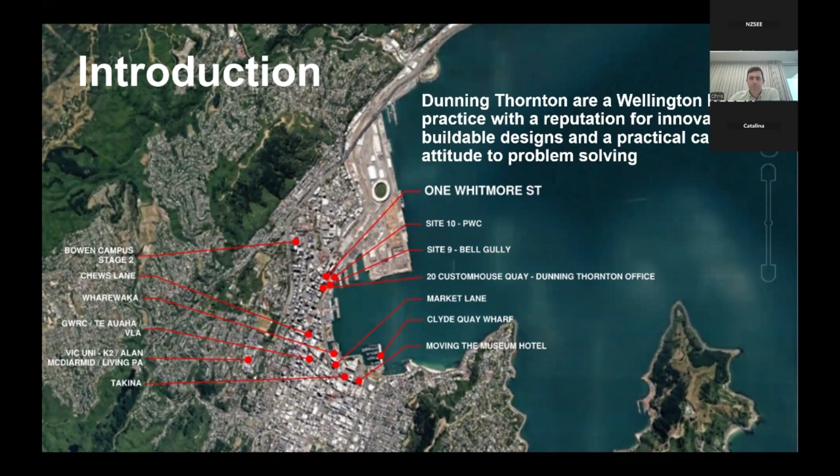This project was instigated by our client Newcrest, a developer based in Auckland, but recently they've done a lot of their work down here in Wellington. It was the second project we've done with them of this scale, the first being the building we're in now, 20 Custom House Quay.

Luckily, we also had a number of subcontractors engaged early who had been involved in the 20 Custom House Quay project. They were MJH, Thermosash for facades, and Robinson Seismic for the base isolators.

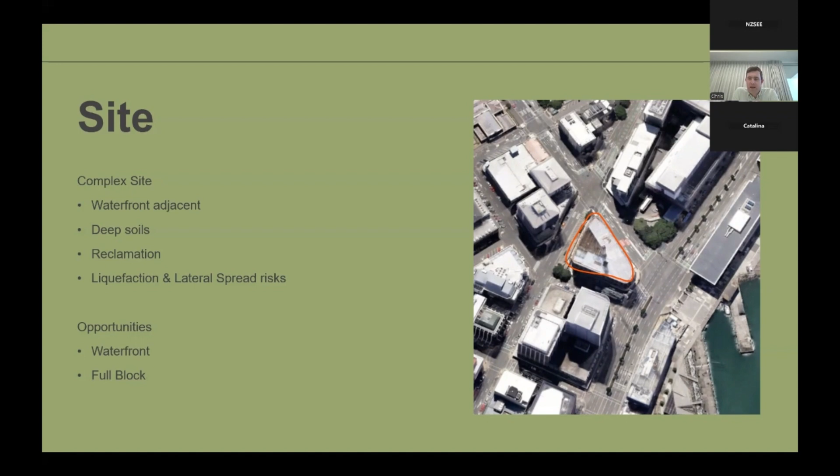That said, massive opportunities for this building. It's an incredible site, panoramic views in all directions. You can see up to the Beehive and see all of the waterfront. And so an amazing, once in a lifetime site in Wellington.

So we've worked on a previous project before with the same client, 20 Customhouse Quay, and we were looking for the same kind of performance criteria as that building. So it's an importance level 2 building, so we're designing for a ULS of 1 in 500 years. It was benchmarked against current code, but we carried out geophysical testing, including boreholes to rock and shear wave testing down to rock, and established a more modern seismic hazard for the site using PSHA techniques, which were carried out by GNS.

Being a base isolated building and having quite a long period, at the long period the hazard and accelerations were quite similar to that of current code. And that's what we've seen as being one of the benefits of base isolation, particularly in Wellington, is that you're not seeing this significant uplift in accelerations when you look at these PSHAs or the National Seismic Hazard Model.

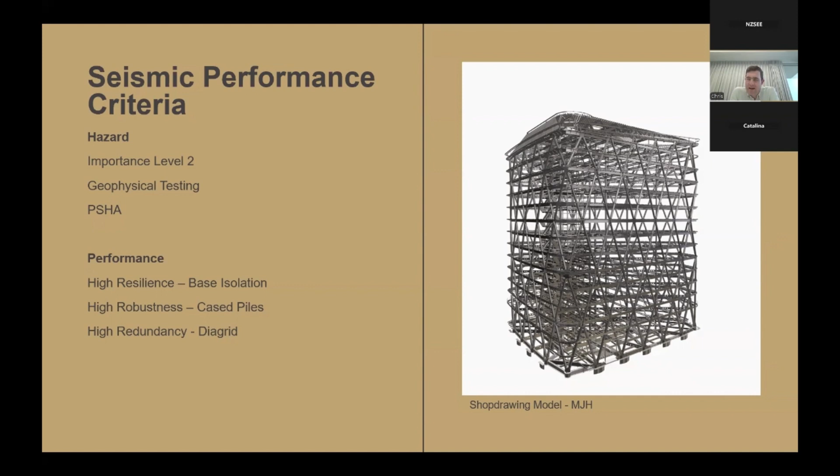So in the ground, we looked at the base isolation structure. So we started at ground floor. So the ground level of the building is raised above the existing surrounding ground by nearly a metre, and that provides the benefit of flood mitigation, and also simplifies some of the detailing required for the base isolation. So we generally try with these buildings to have the ground floor pass over the perimeter ground, and it just provides a much simpler and more affordable base isolation detailing.

But we still needed to build a kind of a semi-basement below the building to accommodate the P-delta structure, so the large structure for the ground floor, and the base isolators and their support structure underneath. So we were still excavating down 2 to 3 meters into this reclamation material. So we weren't removing it all. We had a basement that didn't have cars in it. It was just a rattle space.

What we tried to do to mitigate some of the risks around the ground and potentially these overload cases is that we wanted to target having the largest moments in the piles within the depth of the casings so that we could have a very high safety factor in effect over the loads that we were seeing from the geotechnical analysis. And what that meant was that we didn't want to have a fixed head pile because we wanted the large bending moment to be in the casing depth.

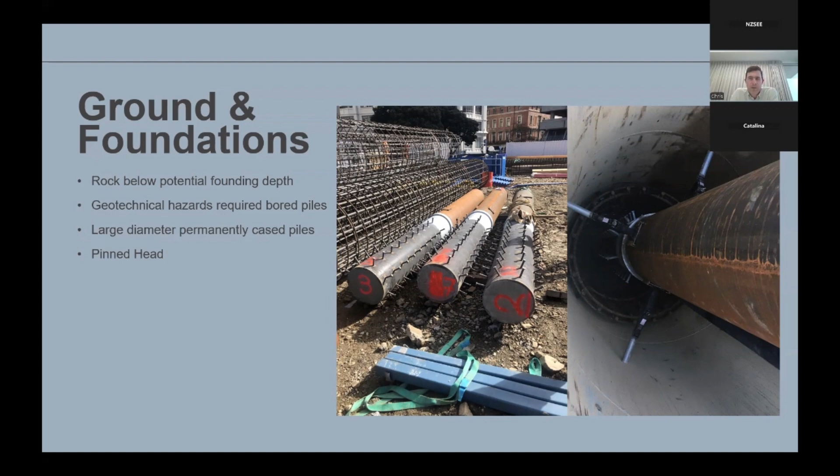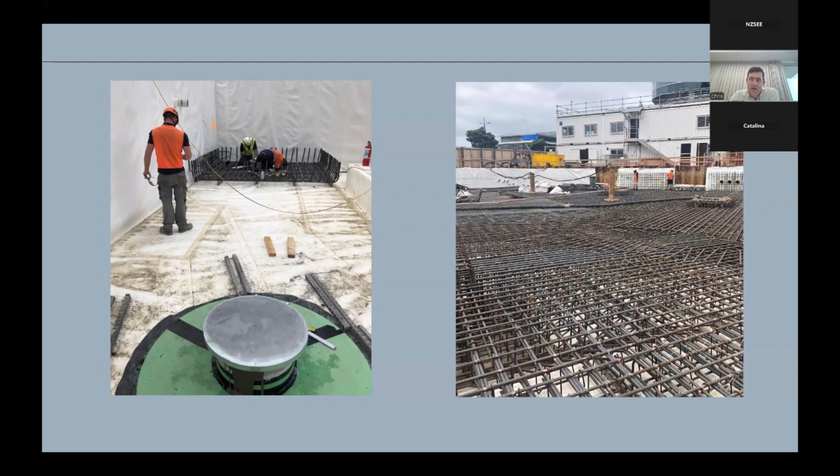The building is base isolated. I went through my photos and couldn't find any better photos of it than this. But this is one of the base isolators for the building. We used LRB bearings. We looked at sliders, but the main drivers were we had an approach that we were happy with from this previous project. We wanted to keep the displacements relatively small because of the height of the building; the P-delta structure can kind of run away on you if you start having very large displacements.

And we knew that whilst we weren't going to have the kind of extremely low base shears that you can achieve with a pendulum, the downside of that is also there's potential for movement in wind. So it struck a good balance for this project using LRBs, and we didn't need that many of them. There's only 28 LRBs for this building on its 1,500 square meter footprint and 12 to 13 stories high. So 28 LRBs sitting over 28 piles. They were designed for 750 millimeters of movement in any direction, and testing was carried out in Malaysia, where they're fabricated by Robinson Seismic.

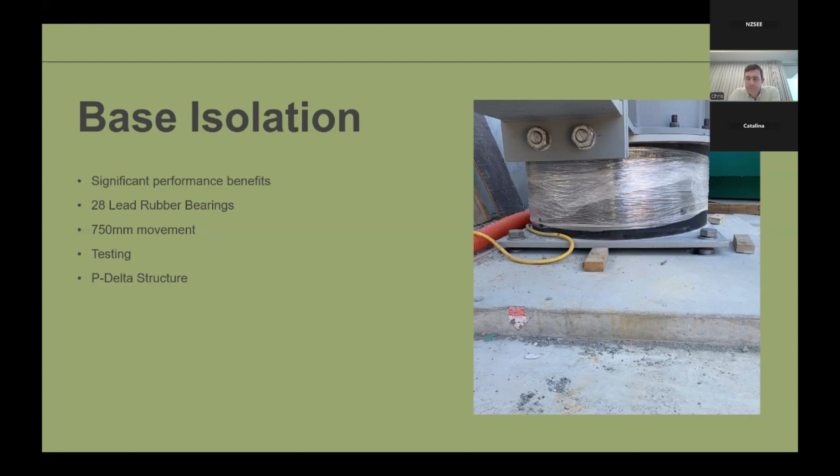A few more photos of LRB installation. So you've got varying levels of tolerance as you build up the building. We've got piles with their 75 millimeter offset tolerance. Then we've got concrete and reinforcement, which has its own, and then we're getting into steel structure and LRBs above, which have got very tight tolerances.

So in this job, we allowed drossbacks to be installed in the raft slab, and then they could allow, I think, M56 10.9 anchors to be installed in those, and that allowed about 30 millimeters of tolerance in any direction to allow the surveying of the LRBs. And then these were a couple of other things that we carried out on site just to make sure that we were getting some of these interfaces constructed appropriately.

So the central one is placing of the dry pack, the grout underneath the isolator. We did this about 3 or 4 times to make sure we were getting consistent results. Essentially, you have to pump grout underneath the isolator, and it's considerable size. It's 1,400 square. So it is one of the more complicated aspects of the construction of base isolation. And this is the other one just showing the filling of the drossback to make sure we were getting it fully grouted around the whole of the anchor.

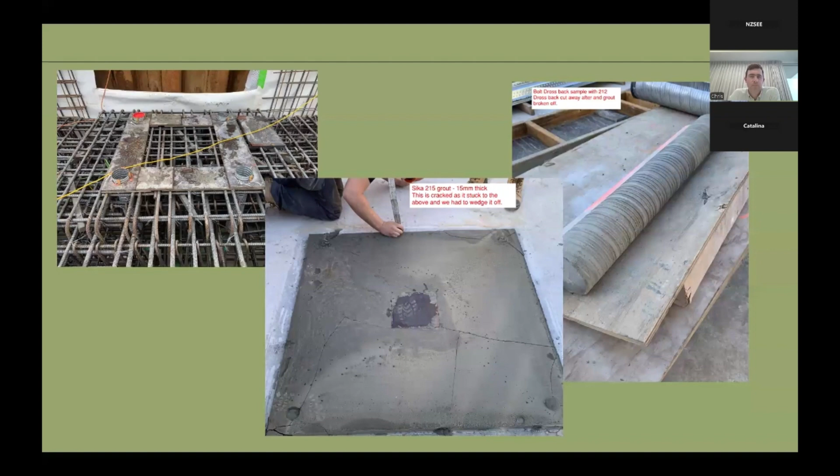Superstructure: the building's a composite steel structure, so generally concrete filled steel tubes for columns and the diagrid, and composite steel, generally cellular beams for secondary beams, and just beams with holes in them for the primary beams. The grid is about 12 meters from the internal columns to the exterior, and as you can see, it's a triangle. So there is no real specific grid. There's a whole lot of things that set out where the columns were positioned, but the longest span of the primary beams between the columns is about 9.5 meters.

Composite construction, so ComFlor, Nelson studs fired on site, and generally it was a pretty repeated footprint of the building from level 1 up to level 12. The things that changed, as you can see here, there's a few unusual features. So you can see these V-shaped steel sections which connect out. This is just something I like to do on these projects, make sure that we're connecting the diagrid in with redundant load paths. So the diagrids are connected in always with steel back to the main steel, and then there's also reinforcing bars in the slab to tie it back in the slab depth as well.

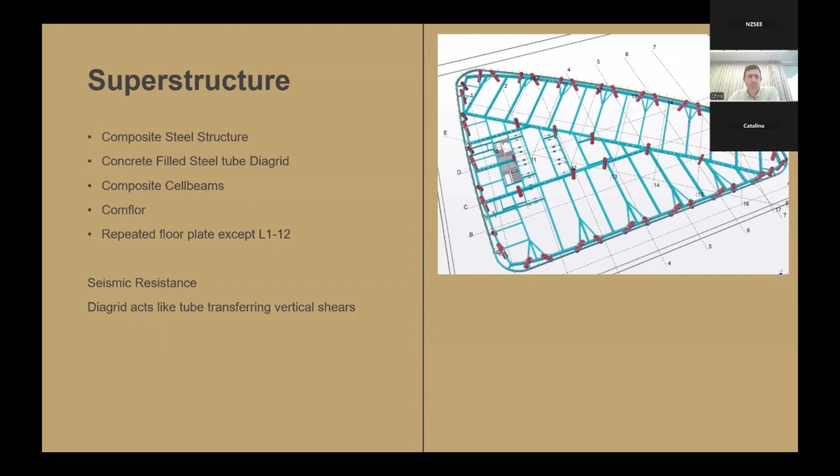So these are a few snips from the shop drawing model. So relatively it's a triangle, but it also has curves on it. So the curve on the north side and west side is kind of a 215-meter radius. So a relatively gentle radius, but it does mean that none of these nodes are kind of planar, so they've all got some oblique angle or complex angles to them that makes fabrication of them somewhat difficult.

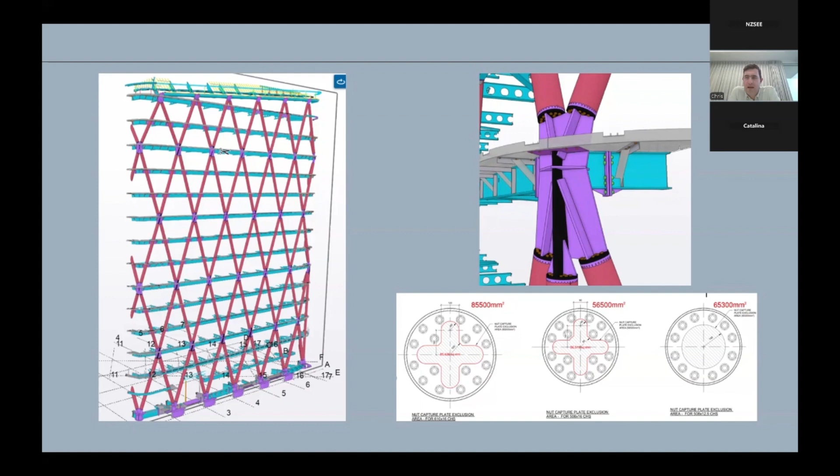And this is kind of what's shown in the top right, one of the corner nodes. So at the skinnier ends of the building, we had some corner columns to limit the compression and some of the tension on the corner base isolators. But it's a very complicated piece of fabrication, and the steelworkers did an incredible job with some of this very complex steelwork.

What's going down the bottom there is the way that the columns are connected to the nodes, with captured nuts. So the nut is installed inside the tube and effectively can't be accessed. So there's a series of plates which hold those nuts in place, and we needed to work out effectively how much bearing area we needed at the end of the tube.

So that red area that's indicated there is effectively cut out of the nut capture device to allow full and solid bearing of the concrete fill, which was a self-compacting concrete, and that was then topped up. They were all fully filled right at the top with non-shrink grout.

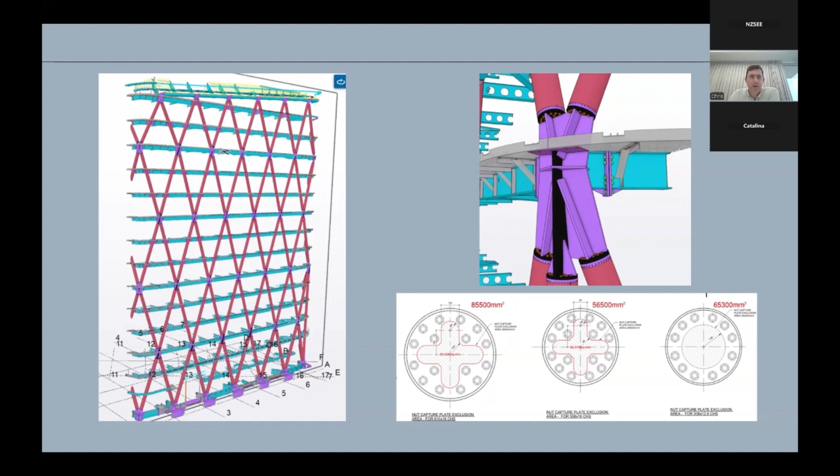Construction and fabrication. So, as I said, very complicated nodes, but other than that, a very repeatable floor plate. So there's a lot of complexity in some areas, but a lot of simplicity and repetition elsewhere. The main floor plate, this is what you want in an A-grade office. You want big open spaces, 12 meters from those internal columns to the diagrid. Cellular beams for simple routing of services.

And in principle, one of the things that we find on these projects is that the fabrication, particularly of the P-delta structure at the base of the building, which is so heavy, has a very long lead time to get to site. You have to indent all of that steel, and then it takes a huge amount of time to weld up each of these nodes. And the ones at the ground floor are the largest. So they've got the biggest welds, something like 50 and 60 millimeter full pen butt welds all over the place, as you can kind of see here.

So we're working really with the contractor and with the fabricator to do early shop drawing processing. We'll do early consenting and tendering for a number of these trades well in advance of the architectural building consent. The other thing, to achieve these kind of tolerances, you're talking about parts of a degree, is that in general, these nodes end up having a number of their faces machined.

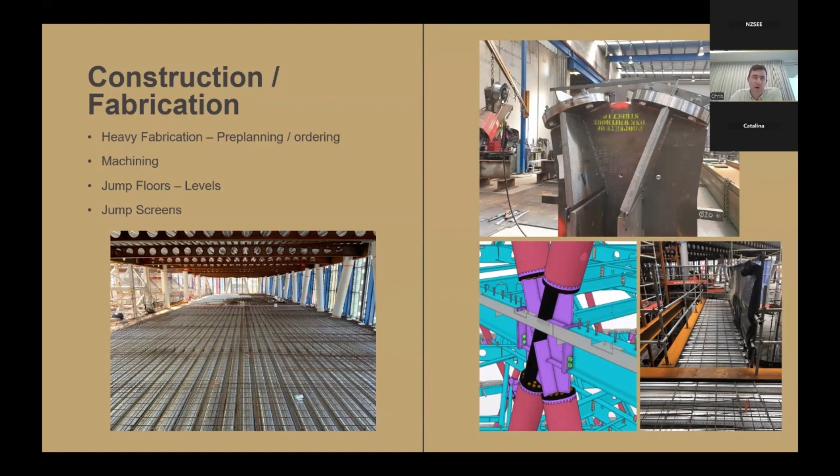On this job, also, just because there's a lot of work and a lot of big heavy bolts around the perimeter, the contractor elected to use jump screens, which was kind of an innovative approach that we don't see often in Wellington. We see them more often in Australia with these kind of jump slabs. And that effectively was a screen that cantilevered up about 3 stories and provided protection for wind and also dropping of any objects.

So, as you've probably seen from the photos, this building is quite aspirational in terms of its architecture and obviously its structure. There's a lot of integrated design. So the building is kind of a glazed skin with these white precast canopy fins at the bottom. That's kind of how it started.

So we did a base build, and it had a very simple sloping base, a flat monopitch roof, and then everyone got very excited when the tenant came involved, and we designed a beautiful and extremely difficult to design complex roof. So there's actually a roof oculus, and an outdoor area in the center of the main roof up on the top. And there's also mezzanine floors up at the top level.

So, as you can see in the top right-hand corner, very complicated geometry. It's kind of aligning with both the complex plan geometry of the building, but a lot of shape in the roof form. So really the only way this could be done in any kind of cost-effective and time-effective way was with full steel construction and prefabrication. So whilst there ends up being timber battens and plywood over the top of the whole thing, the whole substrate was constructed in steel.

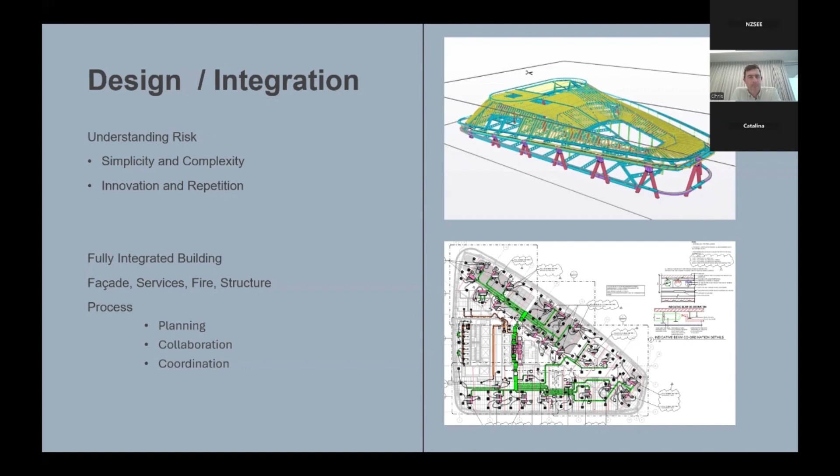Sustainability. So no one's saying this is the greenest building that's ever been built, but we spend a lot of time and a lot of effort on these buildings trying to make their impacts on the environment as low as possible, while still achieving all those project goals and keeping the risks for the project relatively low. So the general approach that we took on this project was trying to enhance the design life. So the foundations, for example, we've designed them for a 100-year design life.

Most of the building is encapsulated within the envelope. There's only small parts of the building, for example, the basement, which are really exposed to exterior conditions. So most of the building is in a situation where durability can be managed for a very long period of time. Obviously, the base isolation system and the resilience of the building mean it's less likely to be demolished in the long term, which is just less buildings we have to build in the future and less material going to landfill.

And we also looked at reduced carbon options. So generally, what we looked at with that was around, so we couldn't really compromise things like we needed to have high strength concrete fill in the steel tubes, which just inevitably does require a lot of cement, unfortunately.

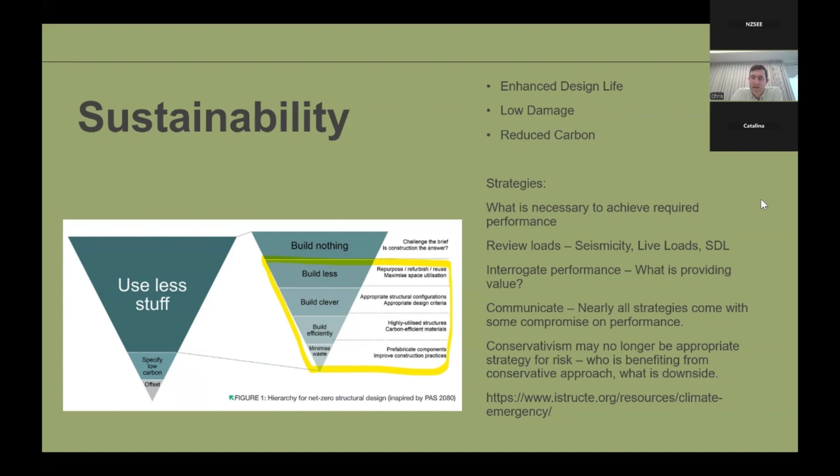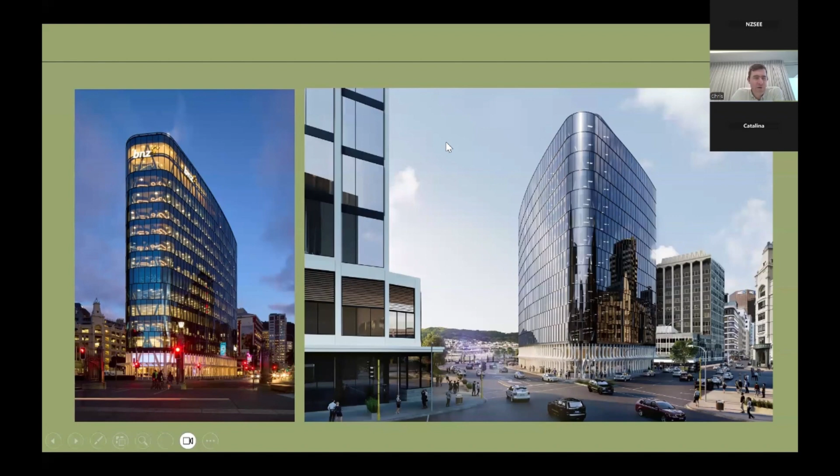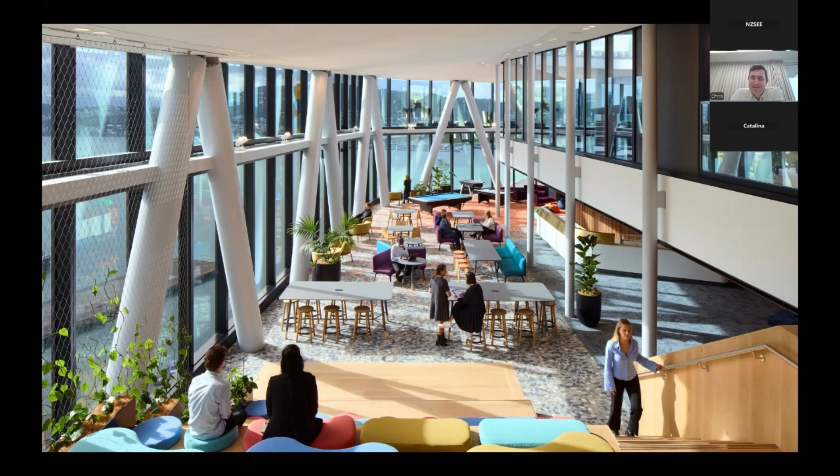And then I've got a few beautiful pictures, as I'm coming to the end of my talk. Yeah, so this is the mezzanine floor and oculus up at the roof level. So just when you think you've designed all your diaphragms, you get one that's not connected into half the diagrids of the building. But we made it work somehow. Yeah, and it's a beautiful space in the Wellington CBD. Great addition.

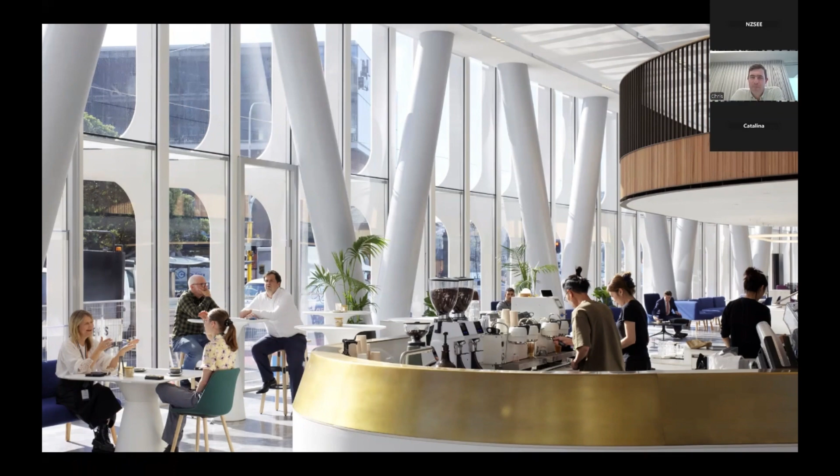And this is one of the main features of it that you can see from the ground floor. Lincoln Fraser was the main client's representative, and the family owns Newcrest. His father was involved in precast for a number of years, so we really wanted to look at using some precast on the project, and we've designed these post-tensioned white concrete fins. There's no coatings on these white concrete fins that support the canopy and also the glazing. An incredible job by the architect and the contractors to resolve all the complex detailing around this.